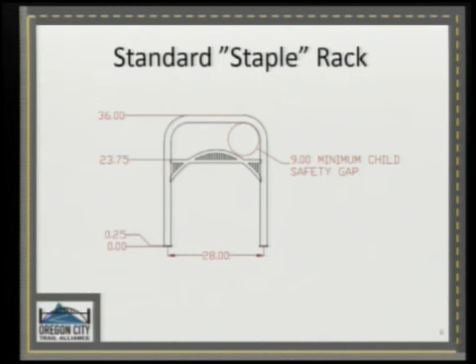One of the things we've been talking with them about is round versus square tubing, and the reason I'm bringing this up is we've been also talking with city staff about the potential of developing this design as a city standard, because the city has no real bicycle rack standard. So one of the things I had been talking with the vendor about was square tubing versus round tubing.

I happened to be looking around on the internet and saw this picture from Bike Portland where round tubing was cut with a pipe cutter, which you can do quickly and quietly, versus square tubing, which is more difficult because you have to use a saw, something that makes noise, to cut that rack. So it's just a little piece of what I'm learning about bicycle rack design - a fascinating component.

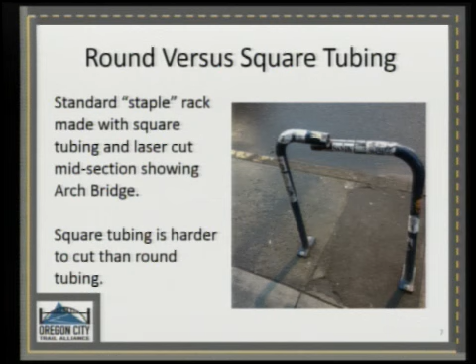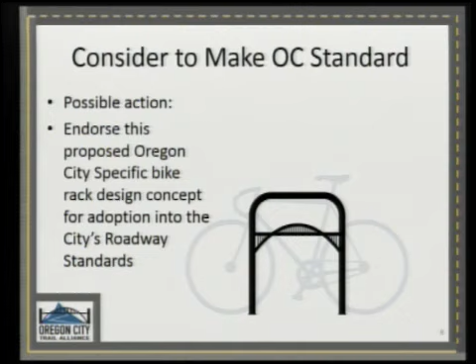So what we're looking for is possible action from this group in terms of endorsing this concept or proposal as something that could be incorporated as a future standard for Oregon City's bike rack design. So when a developer comes in and there's a development requirement to put in a bike rack, they would install one meeting these particular specifications.

As part of the grant we've been working on, we've been doing outreach within the community. We've presented this design to the McLoughlin Neighborhood Association, who liked the design enough that they're getting a list of about 50 locations where they'd like to put these racks. We've also gotten endorsement from the Barclay Hills Neighborhood Association, and Shelley Beatty, who's helping with this, has gotten a verbal endorsement from the Chamber of Commerce.

During the grant application process, we had identified a number of locations that we reached out to, some of whom wrote support letters for the proposed grant when we were initially developing it. That includes the Pioneer Senior Center, the Singer Hill Cafe, First City Cycles, Oregon City Brewing, Museum of the Oregon Territory, 505 Bar and Grill, the OC Train Depot, First City Central Bistro, and Oregon City Parks Foundation.

Also, as I noted before, we've been working with Oregon City staff on the idea of making this a bike standard. As far as the grant goes, the Trail Alliance is moving ahead, and once we settle on a design and the city is okay with it, we'll purchase the racks and go through the permitting process with the city. Assuming certain criteria are met, city staff will hopefully be able to help us with installation, at least as a starting point.

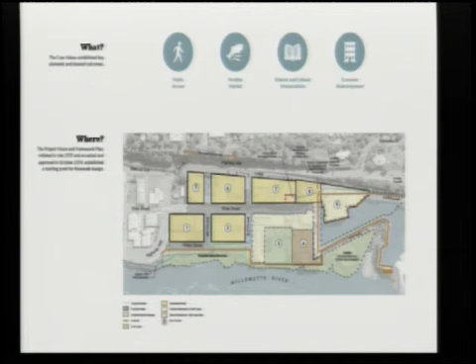We're also engaging with 5 tribes that have historic and current ties to the falls. From time immemorial, people were here at Willamette Falls harvesting lamprey and fish and gathering here, and we are very seriously engaging with those tribes to make sure their interests are respected and protected with any plans we make.

We've identified 9 key uses that will be part of the Riverwalk. Some are quite obvious, like falls viewing, access and paths, walkways, and biking trails. But others we want to specifically call out because you wouldn't always have these as part of a Riverwalk: collective gathering spaces, event spaces, access down to the river, historic reuse and cultural interpretation, and even PGE dam operations. There's an operating dam out there, and our design will have to accommodate the needs that PGE has.

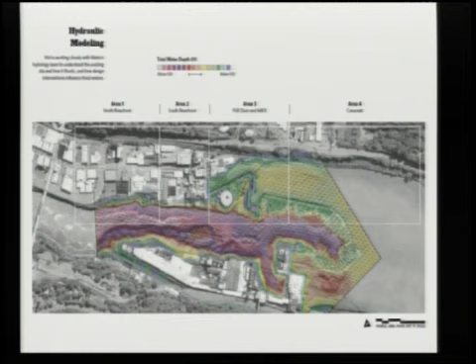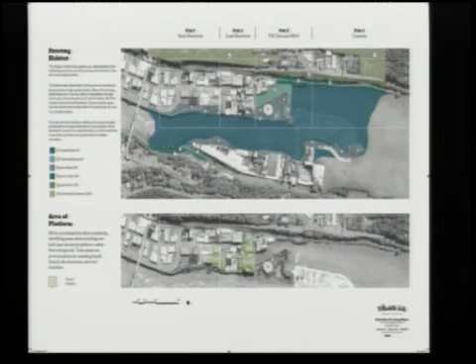We're designing different habitat types into the site that used to exist there, bringing back habitat that used to exist. There are 6 habitat types that we're designing for and planning for.

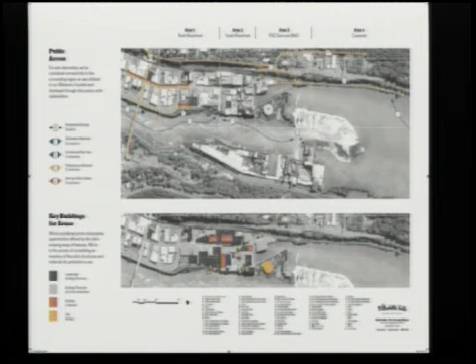We've done an inventory of all the buildings on site. In the framework plan, 5 of them were identified for reuse. You might see more than that eventually reused on the site, but we've identified which ones need to go in order for this Riverwalk to be built.

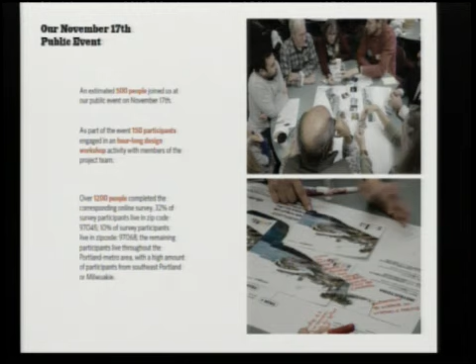And now for the design alternatives. But first, we always want to remind ourselves— I'm just going to skip this one, sorry, this is out of the order I'm used to.

This was our event in November. We had about 500 people show up, and then we posted a survey online. It's still online for the next 3 days, so if you haven't taken it, you can go on our website, rediscoverthefalls.com, and take that survey. In the first couple of weeks of the survey, we had 1,200 people take it, so I have some results from that to share with you as we talk about the different design alternatives.

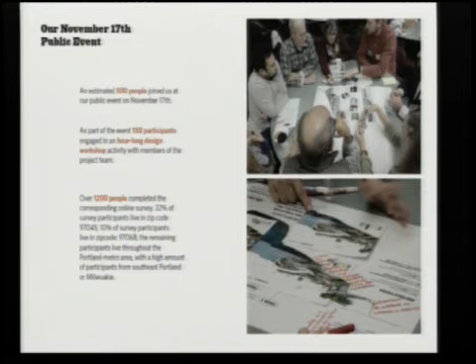In order to break the site up into little pieces and more easily tackle design, we've divided it into these 4 sections. So I'll focus on each one.

The Canemah connection is area 4 up there. We don't have anything in this presentation that's going to show that Canemah connection, but I can tell you what we are looking at is potentially a trail that would connect down to the neighborhood, go over the railroad tracks, connect into Canemah, and or a trail that just kind of dead ends and has a portage location so that if you're in a canoe or kayak and you're coming down the river, you can get out above the falls and then travel through the site and then put back in below the falls.

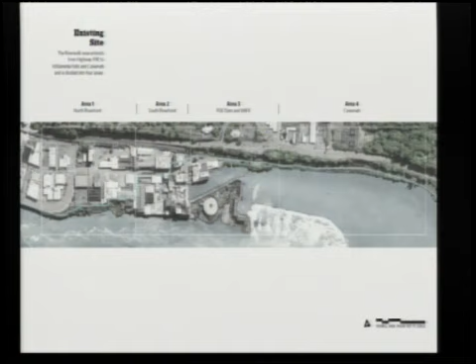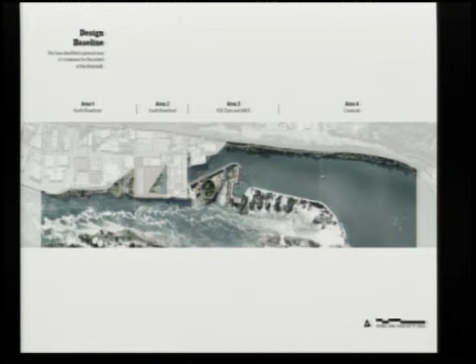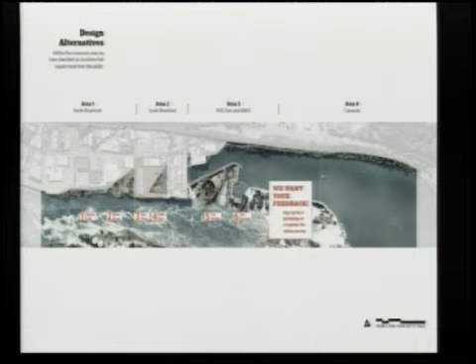This shows where we were in November, and at that point we still had a lot of homework to do. Right now we're still doing some of that homework, and we will have updates to share with you in March and a few more questions to ask. So that survey that's on our website now is going to be replaced with another update and survey, and we're going to ask you for more input then. But what we've been asking about is these 6 key aspects of the waterfront design.

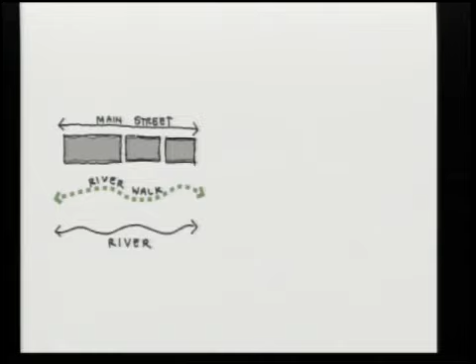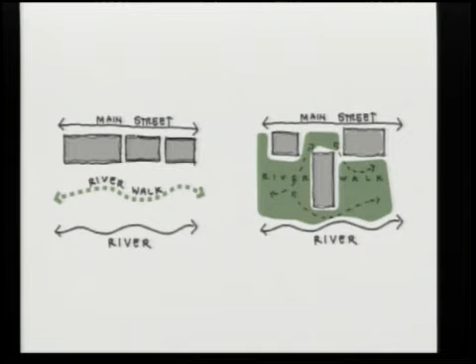We also always want to remind ourselves and everybody else that the Riverwalk is more than a walk. Traditionally, a Riverwalk is a path between the river and buildings on Main Street, but really we're looking at a different definition of a Riverwalk that spreads out and connects Main Street to the river. In the same sense, we're looking at it as a 3-dimensional Riverwalk as well, to get down to the water and then up above to see views up and down the river.

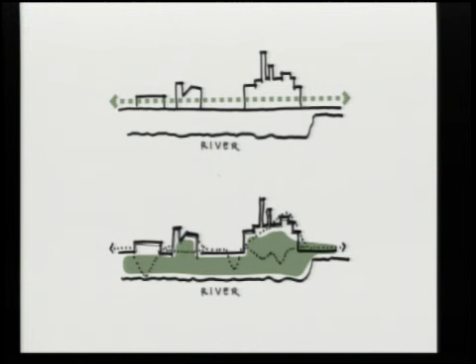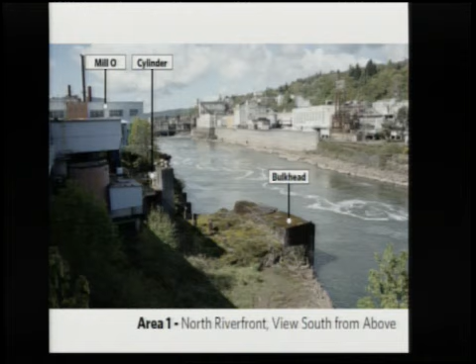These are existing conditions, lots of industrial structures along the waterfront. And we presented 3 options. This first one is just habitat restoration and a place for people to observe, maybe fish from that location, but not actually access the water. The second one was a kayak launch in a gathering space, and the third one was an actual boat dock for motorized boats.

And that kayaking, paddle boarding is big now, so that would work there as well. Absolutely. And canoes—any non-motorized watercraft. When I say kayaking, I mean all of those things. Are you essentially including recreational type stuff? Is that what you're talking about? Yes.

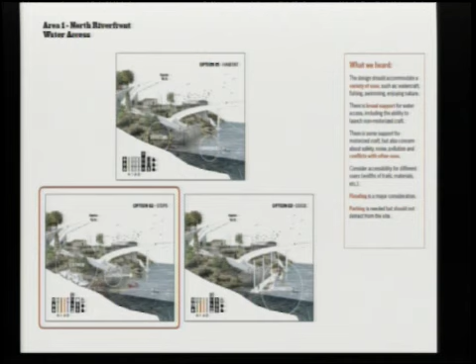What consideration have you given to tourism via boats from Portland? Because I know the big ones are going to be bringing people up, because it's there. The river's there, so why not? What is it, Spirit of Portland? Yeah, we talked with Portland Spirit. We talked with Willamette Jet Boat about potentially having a landing somewhere on the site.

Basically, the water, the river in this area is very turbulent and treacherous, and it's too close to the falls really to get any sort of commercial boat access. Now, where we might be able to eventually get commercial boat access is above the falls in the intake basin, and I'll show you that later. But that's still something that may be on the table. Below the falls, what we've looked at, it's just not possible. Yeah, it makes sense.

And then we also asked people in the survey and at the event to look at these precedent images and examples of different trails and tell us what sort of feel and experience and material they'd like to have as part of the river walk. And we heard anything that had green vegetation in it was more popular than the kind of stark, dry-looking photos. And then natural materials as well.

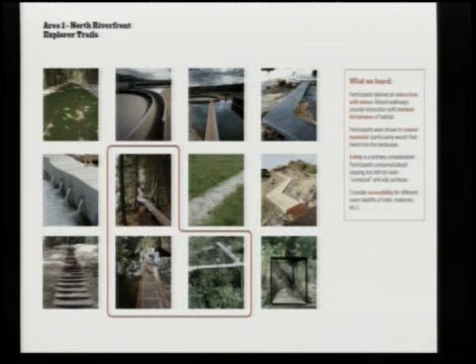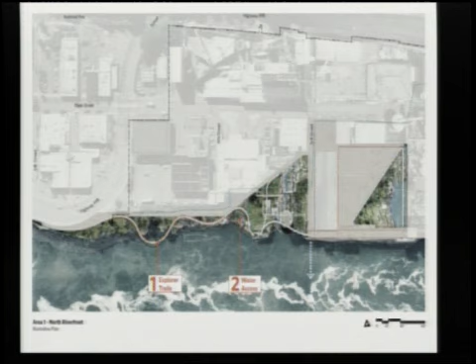What specifically? Well, I'm thinking that the beach trails that the parks has are similar in character to this, and there might be some carryover from what they've learned over the 30 or 40 years that they've been dealing with them. Yeah, we do have Dennis Wiley with State Parks on our team, so we can make sure we ask him specifically about that. That's a good point. Because some of these trails are going to be built in areas that flood. So they will be inundated probably at times. They have quite a few elevated trails too. Yeah, thanks.

And thanks for asking a question, because I am going to take notes. So any opinions that you share or questions, we're taking all those down and then sharing them with our design team. So we definitely want to hear what you think about all these ideas. So as I've listened to this, I'm wondering, you have a lot of grant money, a lot of partners financing the front end. Are you doing cost-benefit analysis or operational analysis so that in 10 years or 20 years you can maintain this thing if it's built? Yeah, that's a big part of it.

We don't know yet who will operate and maintain the Riverwalk. We're still having those conversations. Could be Oregon City. It could be a partnership of Oregon City with some of these other government partners that we have. It could be a nonprofit entity that doesn't even exist right now. So that's really something that we're going to figure out soon. And then what the budget is for maintenance and operations as well hasn't been determined.

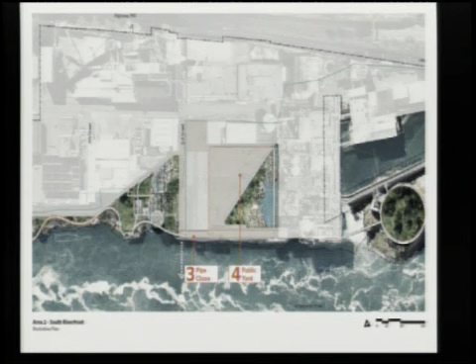And then this structure right here is called a pipe chase. It's over 300 feet long. It's this big concrete tunnel, basically a hollow square tunnel, that our design team is looking at repurposing. So we have some design options about that.

I think that's the mouth of the creek that goes through Public Works buildings, operations buildings. It actually connects. It doesn't connect to any creek. And the water was originally brought in to power the woolen mill. And if we wanted to have water actually flowing through there, we would have to bring it in somehow, or filter storm water through there. But the river actually might come up into it as well.

Is that access to the river, as you refer to, going to be public or is that going to be commercial or private? We don't know exactly how it would be set up, but we're thinking of it, I think, as public. Not a pay to play. Like all of the Riverwalk. Yeah, because that issue's been discussed and it's kind of controversial by its very nature. Yeah.

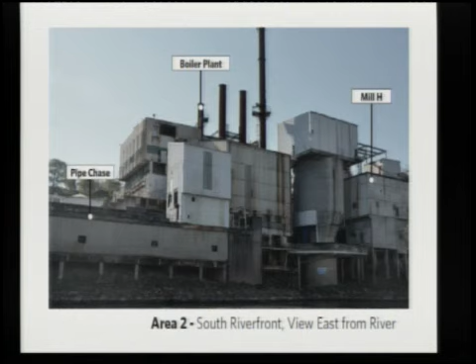This is what it looks like today. The alcove that we saw in the last photo basically was here. And so if you see all that fill that's been brought in and then all the structure that's built on top of it, that could be removed. So we're looking to remove at least a third of that pipe chase. So the section that we're looking at there could be removed, and then leave the remainder of it to be used as part of the walkway. And that's in the public yard. The pipe chase is kind of on the edge of it there.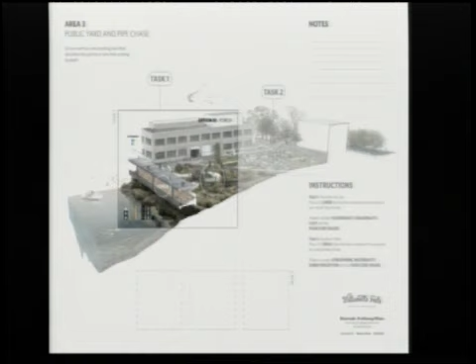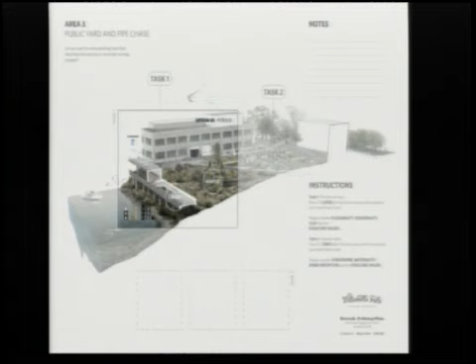And then we have about 5 different options that we showed people about the pipe chase. And I'll tell you which ones were the most popular, but there's a porch option where you open it up, let people go inside, and on top of it, a bridge option where you remove the bottom half. This one's called porous, cutting holes in it to allow light to pass through down to the water. Kind of cutting it up, chopping it up, and then removing a vast majority of it to restore habitat.

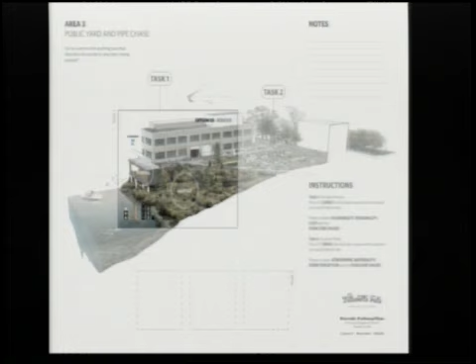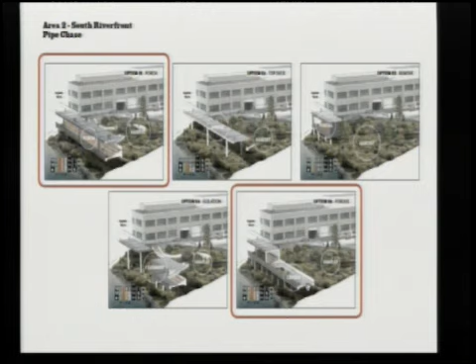So we heard various levels of support for all those, but the most popular were the porous option and the porch. And so we'll probably see something in the preferred design that looks kind of similar to this, I would imagine, with a third of the pipe chase removed.

I'm wondering, you guys are making decisions, but is anybody looking also at the cost? One may be preferred by everybody, but may cost $100 million. Right. We do have preliminary cost estimates for everything, and they are pretty close to what our budget is. The full Riverwalk, hard and soft costs combined, is $60 million, and we have about 20 for phase 1.

So the question before us now is, we have this full concept that we're going to share with you that's a $60 million project, but really what can we do in that first phase? What's that $20 million going to go towards? So that's a big question that we're grappling with now, and we're looking at these cost estimates very closely. But everything that you see here, the costs weren't wildly different, so they're all fairly comparable.

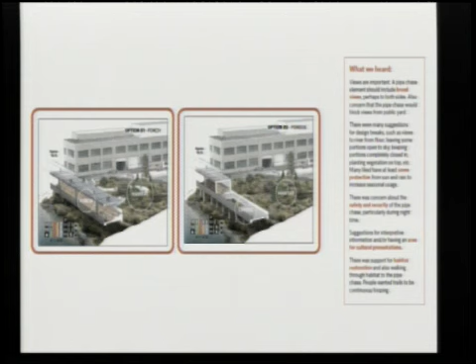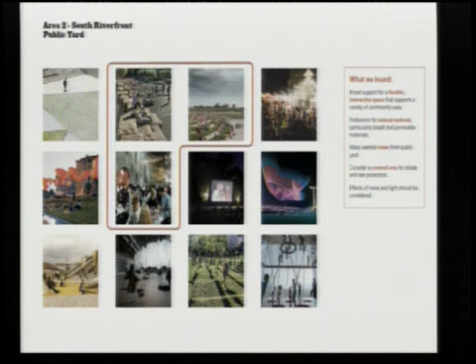For the precedent images, we were asking people what sort of experience they wanted in that public yard area. So seating, art, what sort of events, what sort of materials. So you see the ones with a lot of seating were popular, and showing lots of people was also among the popular choices.

Moving on to the last section, Area 3, this is the PGE Dam, and then Mill E is this building. This thing moves very slowly. Mill E is this building, and it's actually more of an opportunity for private redevelopment. So you won't see that really as part of the Riverwalk. But we're looking at this section down here. So you'll see a path along the PGE Dam to the final falls overlook.

And then the clarifier is a big concrete tank. It's very large, and it was built around 1968 to treat all of the effluent from the paper making process. So all that effluent went in there, went through its cycle, and cleaned the water up before it went back into the river. And today, that clarifier is empty. It's kind of a bowl, the pipes have been cut, and it's not going to be used as a clarifier anymore. So we're looking at ways to repurpose it or maybe remove some or all of it.

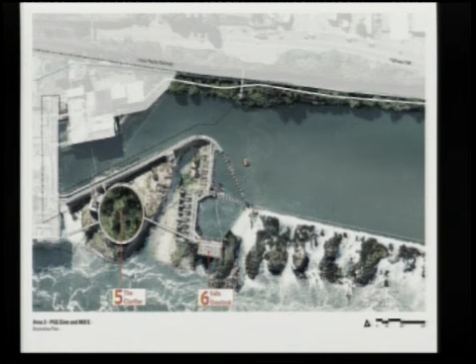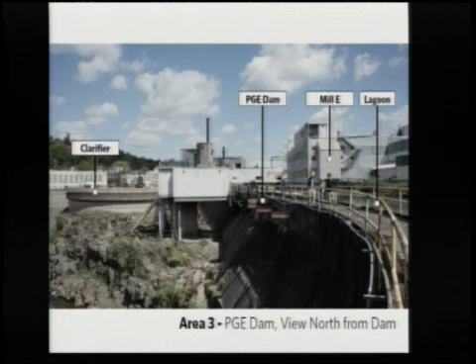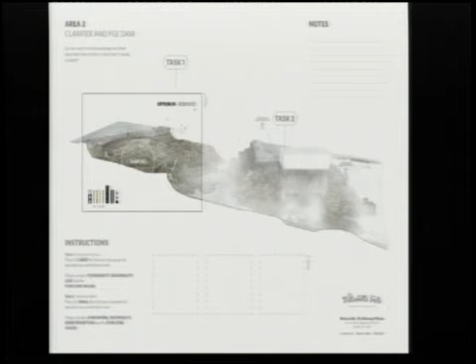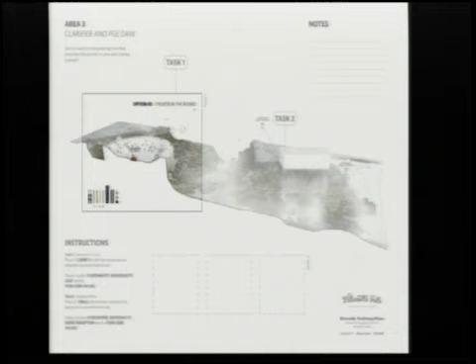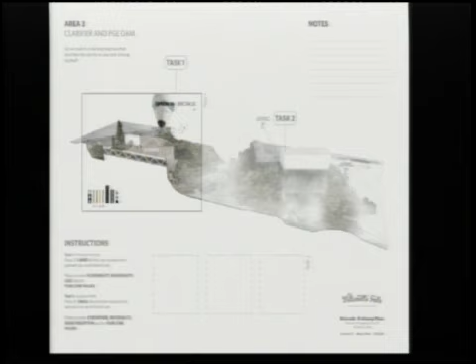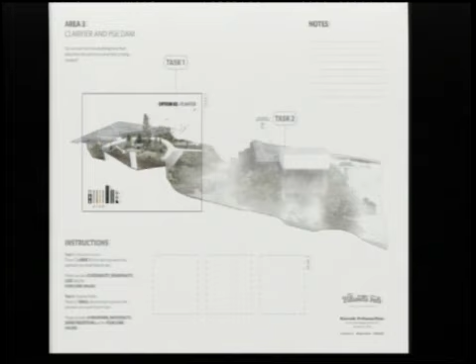And so, totally different perspective now. Now you're in West Linn looking towards the site. One option is to just totally remove the clarifier. Another one is to create an event space. That one's similar. This one is a hot air balloon. It was meant to show a non-permanent attraction that you could bring in. And this, I can tell you, was not popular at all on the survey. What about a big drone? This is creating a giant planter with a walkway around the perimeter of the clarifier, and then this one's similar, but bringing in more dirt to create a little hill.

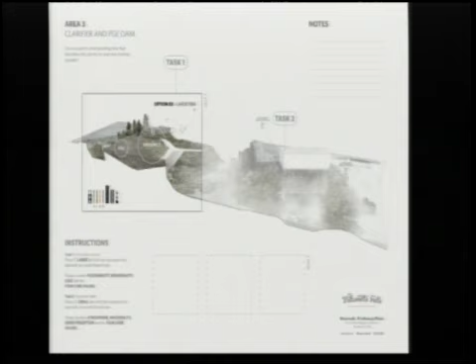A question? Really a tangent, but is that clarifier connected to the pipe that goes under the river to the storage ponds on the West Linn side? Yes, it was. And is Tri-City still interested in hooking up to that pipe? WES bought the ponds, and they have plans for those, but it has nothing to do with the pipe or the clarifier. I'd heard that they were interested in using that pipe under the river. I'm not aware of it.

Well, it's not going to be connected to the site at least. Yeah, but they would have to come through this general area where you're talking about the Riverwalk with their pipe to connect to that pipe if they were going to do that. Okay. Yeah, I think you want to check that out. We went on a tour of the WES facility in town here, and I think there was some comment made about all of that. I don't know the specifics, but they had plans on it for the future. When was this?

They're running tours of the Tri-City facility, and we did this three weeks ago on a Thursday morning or something like that. Quite a few people went. It was open to the public. Quite a few people went through it.

What I know about it is, they own the pipe. There's not been any determination as to whether or not they're going to use it. They own the pipe. They have not. They've been aware of our project for a while. How they are going to get from the treatment plant to those ponds is a huge question for them.

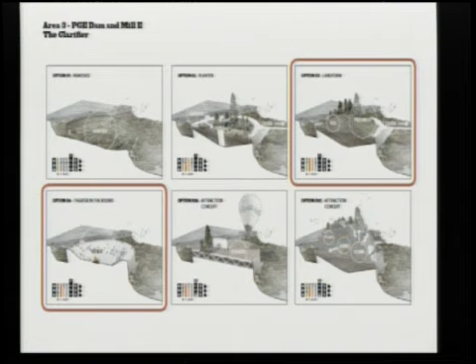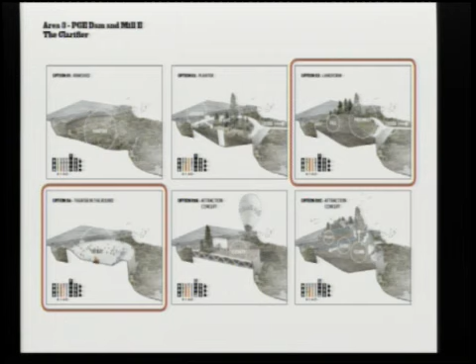I'm just going to say a couple more things about the clarifier. We heard support for event space or this kind of landform example, but one of the main things that people really liked is having a connector pathway to have a secondary connection out to the overlook. So we're going to try and provide that. And then for the overlook, we asked about look and feel, and all these images are on the survey, so you can go on and check them out and choose your favorites as well.

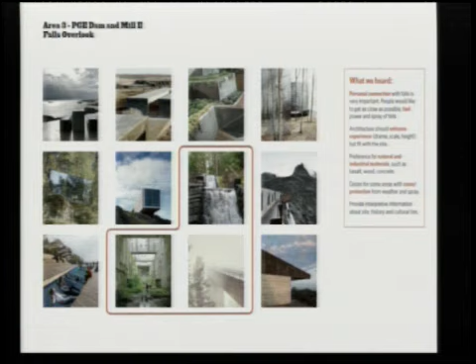So in June, we'll have our preferred Riverwalk design. We'll let you know when that is, because it's going to be a really nice event, and we hope to be able to share a lot of information with you then. And then after we have that preferred design, we'll really get cracking on that phase 1, getting the permits, getting the engineering drawings, construction drawings done, and then starting construction.

And we hope to start construction in mid-2018. So hopefully you'll see equipment out there and shovels and things coming down in 2018, and then that construction, because of all the different permits that we need to get and the time that it takes and the amount of concrete that is out there that needs to be removed, it's likely going to be 3, maybe even 4 years of a construction process for that phase 1.

So with that, I'm finished. Any more questions? Let's start the questions from the right-hand side and go right on through.